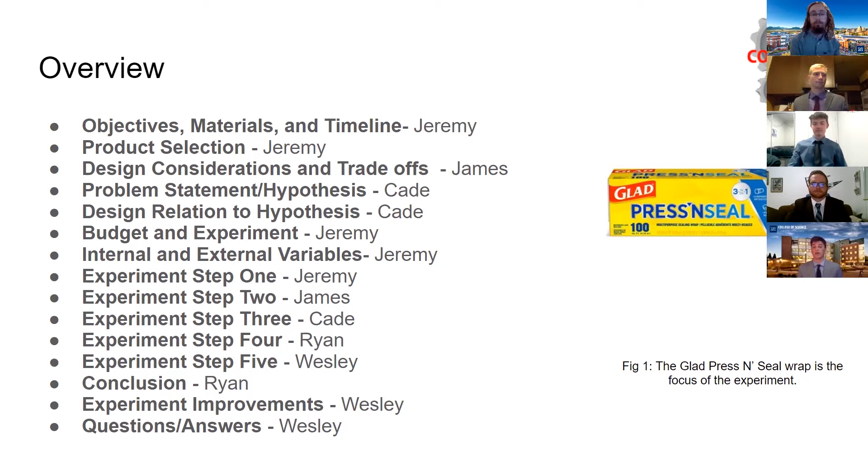And then we will be going back over to Jeremy, who will go over the budget and experiment, as well as the internal and external variables. And then we each divided up the experiment steps amongst ourselves, and then finishing out the report will be Ryan and Wesley. I will now be handing it back over to Jeremy.

Thank you, James. So before we could really decide on what experiment we needed to do, we came together as a group to really compile our resources and see what we could feasibly do for this class. The bottom line was pretty clear. We wanted to do this as cheap as possible as we are poor college students. Take a moment and consider what kind of variables and limitations affected your design choice.

Thank you. So for us, we decided that the budget should be minimal, that the items and resources we have available to us should be used first and preferably not bought or picked up. We needed to meet assignment objectives and due date, as well as also follow the time constraints selected by our group, which was to complete all assignments at least 24 hours before the deadline. And lastly, we needed to continue to adhere to our group's charter and objectives. Next slide, please.

With these limitations in mind, COVID-9 Team selected the Glad Press and Seal airtight and leak-proof test. So we now needed to develop a hypothesis and an experiment to test this theory and whether or not it was truly airtight and leak-proof. I'd like to pass things back over to James, where he will talk more on this.

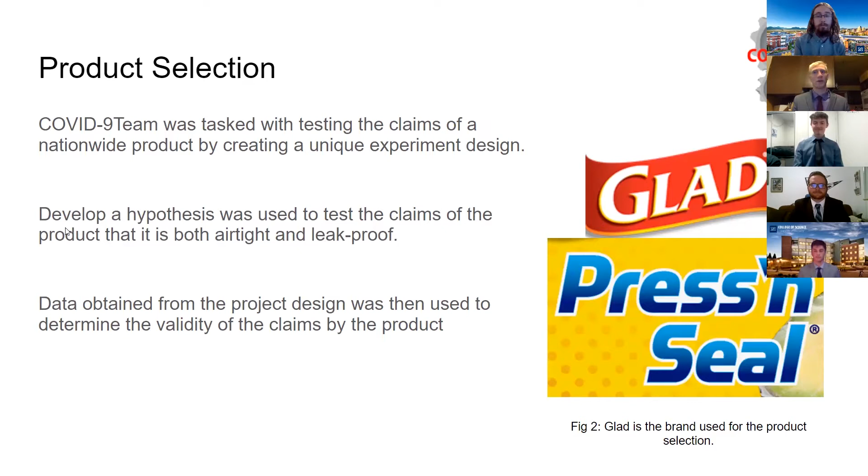Thank you, Jeremy. So we as a group decided to come up with 3 potential design considerations. The first one being a manometer, which is mostly used in measuring changes in fluid height. With that, we can then calculate other things such as pressure. For the second one, we decided to come up with a vacuum apparatus in which we attach a shop vac to a trash can that has been sealed with Press and Seal. And then for the third potential design consideration, we decided to come up with sticking a pressure gauge inside of a vacuum that has been sealed with Press and Seal.

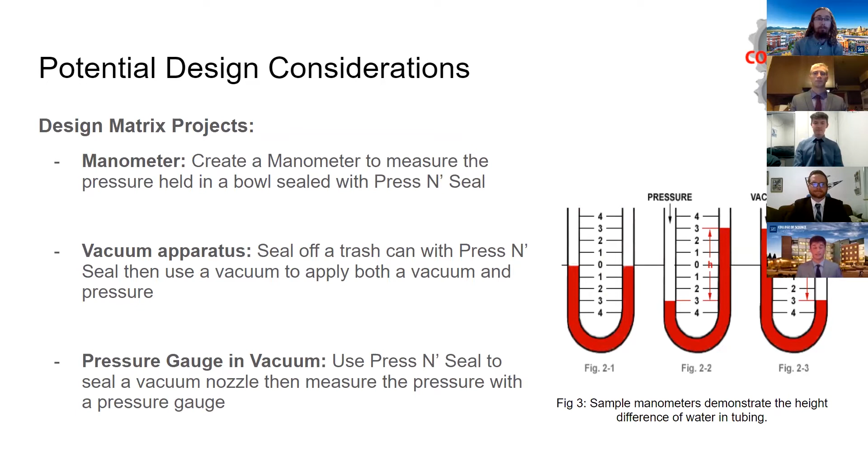I will now be going over the design trade-offs. So for each design consideration, there are obviously pros and cons. For the manometer, a pro would be that a volumetric measurement is easily transferable and could calculate things such as pressure, which is what our goal was for. However, there was a con with the manometer that any sort of exposure to air or leak in the system could lead to a false reading.

For the second design with the vacuum apparatus, the supplies were readily available. You could get them at practically any department store. However, the con with such a large air vessel with the trash can, it would be tough to not only seal it with the Press and Seal, but with a vessel that big, you could introduce multiple outside variables.

And for the third design consideration, the pressure gauge, it would give us a precise reading on the pressure. However, such a precise measuring pressure gauge would probably be hard to find for us college students because of a financial limitation. I will now ask the audience which method you guys decide would be the most practical based on your limitations.

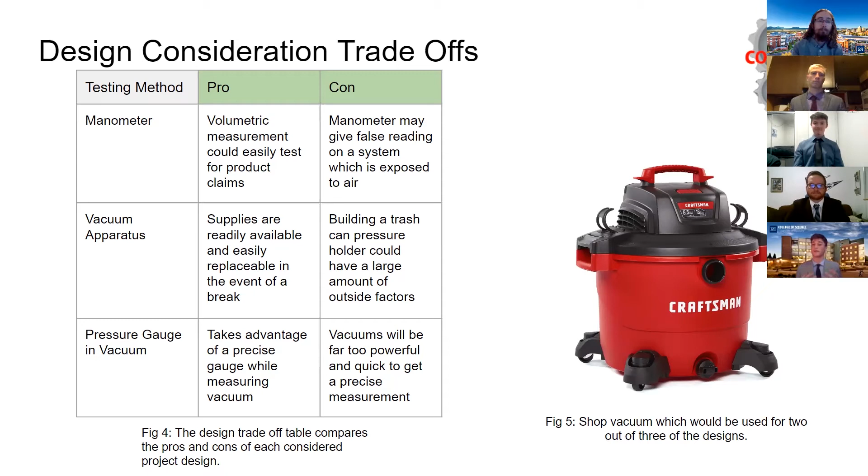Thank you. As a group, we did decide to go with the manometer, and I will now be handing it over to Cade. All right, thank you, James.

So the core problem statement for this assignment is testing the validity of the marketing claims. So the goal is to very much focus on the airtight and the leak-proof aspect of it. And so to test that hypothesis, we are mainly just checking if it can hold a seal for an extended amount of time. And if it's able to do that, it does confirm that the advertising claims are correct. The group essentially agreed that it's a lot of marketing and that the product would not be able to achieve that goal. Feel free to respond on the discussion boards if you agree with the hypothesis.

All right, thank you. And so for the project design justification, again, to just focus on the airtight and the leak-proof aspect, we're testing for can it be held for 5 seconds, both vacuum and pressure. And so overall, if it can do that consistently, we can confirm that it can hold pressure and vacuum, and it is airtight and leak-proof. I will now pass off to Jeremy to cover the budget and experiment.

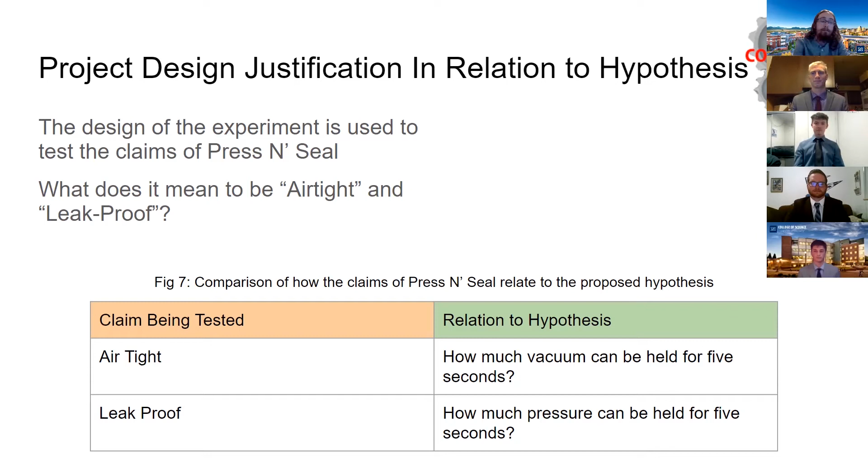Thank you, Cade. So with our project design chosen and our hypothesis agreed upon, we went about developing a budget that would outline how much we would actually spend on this design. As you can see on the chart, the figure behind me, the press and seal itself was about $8. The yardstick was about $5. The dishes that we used to test were an additional $5, and the bulb pump itself was a total of $15. All in all, we managed to keep our entire group cost below $35.

To put this in perspective, we did a little bit of research to see how much one of these manometers would cost if we just bought one online. And we discovered that had we done it any other way, the U-tube and pressure differential gauge alone would have cost us around $210. Next slide, please.

Now that we had made all of these decisions and bought our supplies, it was important to determine what variables we could control and what variables we couldn't control, or our internal and external variables. Some of the variables we couldn't control were the varying textures of different dishwares. Plastics and ceramics do not necessarily have the same kind of textures that allow plastic wrap to hold them as well. It might not have been an airtight seal on the pump that we used. And lastly, the density of the water might be affected by the food coloring that we add.

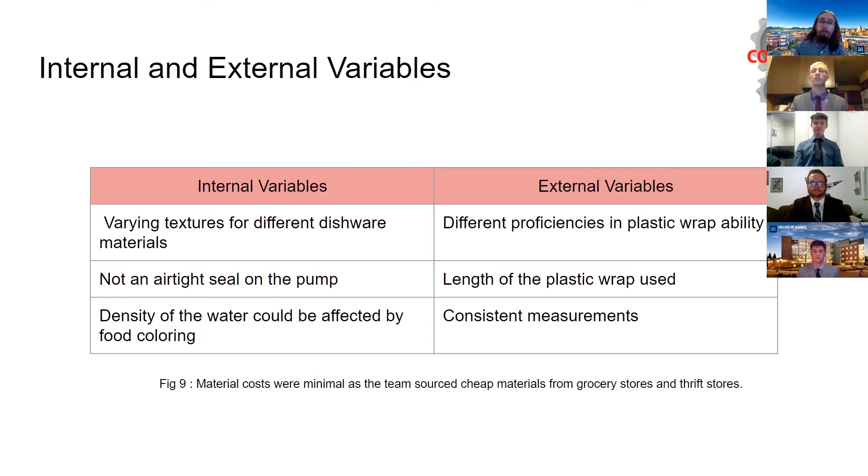And lastly, consistent measurement. Because we were using a manometer that was subject to the human eye of where it fell on our yardstick, we made sure we used only the same 2 group members each time to measure where our inches of food colored water was. Next slide, please. With all these things in mind, we assembled and put our experiment to the test.

We went ahead, and the first step was to take our plastic and ceramic dishware bowls and drill through them. We used a diamond drill bit provided by Wesley that had already been purchased for a different assignment for his work, and carefully drilled through each bowl to avoid shattering. Afterwards, we took a nozzle attachment for our hose and carefully screwed it into each bowl. This made each bowl airtight because after a couple turns, it could not enter any further. It could not get any more purchase on that bowl without shattering it. And next, I would like to pass things back to James to talk about step 2.

Thank you, Jeremy. So with step 2, it actually came down to group members sealing the 2 bowls, both the plastic and the ceramic. So we decided, because it was considered press and seal, we as group mates were tasked with sealing each bowl by only using a pressing method. And then we each decided that each member should only have 2 chances of sealing each bowl. So as a way of being consistent, each member had 2 chances per bowl. So that would be 10 total pressings for each bowl, which led us to 20 total data points. And I will now be passing it over to Cade for step 3.

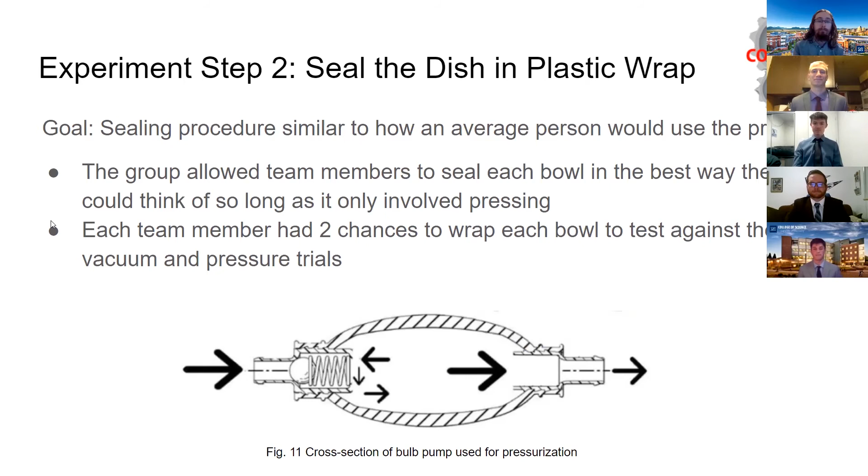All right, thank you, James. So for the next step, we actually attached the dish to the pump using a T-connector and clear tubing. We used the hole that we drilled and then got everything basically connected as tight and as sealed as it could be. That way it reduces the chance that that would be another variable affecting the experiment's results. I'll now pass off to Ryan for step 4.

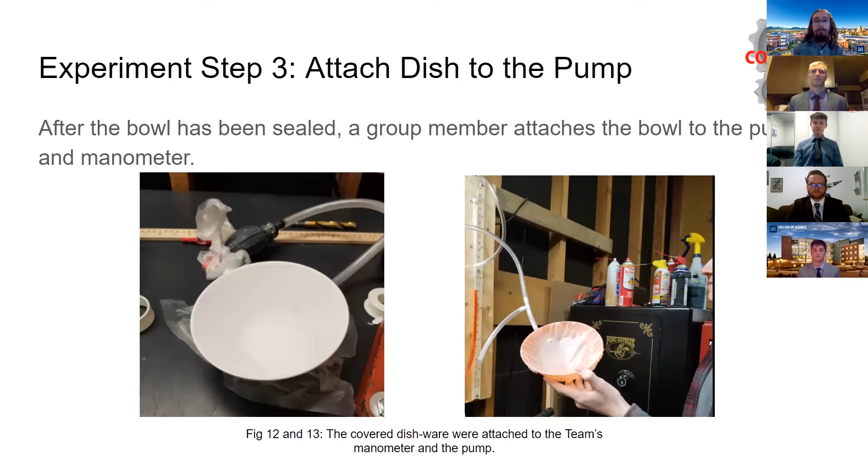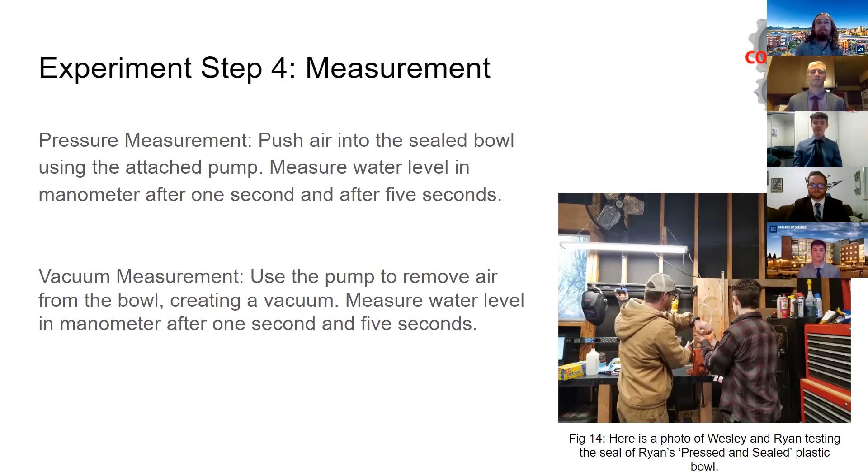Thank you, Cade. So the 4th step of our experiment was to take measurements. Each team member had 2 chances to wrap the plastic bowl and 2 chances to wrap the ceramic bowl. In order to measure pressure, we used the pump that was attached to the bowl to push air into the bowl. And to measure vacuum, we used the pump to pull air from the bowl. The water level on the manometer was measured after 1 and 5 seconds. And now I will hand it off to Wesley for step 5.

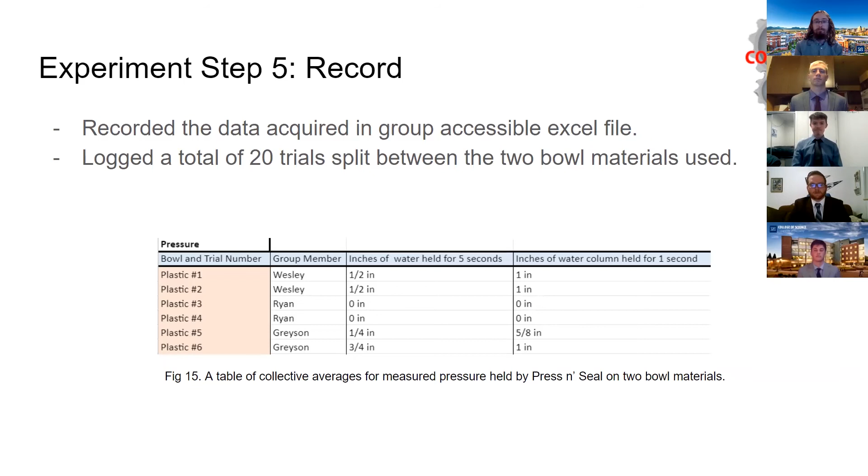Thank you, Ryan. Step 5, we decided to record our data using an Excel spreadsheet for ease of data manipulation and data analysis. We used a series of columns as shown in figure 15, where we wrote down the trial number and material used for the bowl, the group member that recorded the trial, the result that we got for 5 seconds, and the result for inches of water column for 1 second. Next slide, please. And now I will pass it off to Ryan to go over the conclusion.

Thank you, Wesley. So originally our hypothesis was that the press and seal wrap would not create an airtight seal over the bowl. Overall, our team was able to design and conduct an experiment, also on a tight budget, that allowed us to collect accurate measurements about the levels of pressure that the press and seal wrap could hold.

Looking at figure 16, we can see that the average inches of water held by the plastic bowl are 0.375 and 0.638 inches for 5 seconds and 1 second, respectively. And the averages for the ceramic bowl are 0.325 inches for 5 seconds and 0.725 inches for 1 second. Now, I'd like to give you guys a few seconds to look at these numbers and come to your own conclusions about whether or not our hypothesis was true.

So, although the values of these numbers are pretty small, we can still conclude that the press and seal wrap created an airtight seal over the bowl, which is a contradiction to our hypothesis. And additionally, since 2 different bowl materials were tested, we can also infer that the press and seal wrap is able to work on multiple surfaces. And now I'm going to pass it off to Wesley for the experiment improvement section.

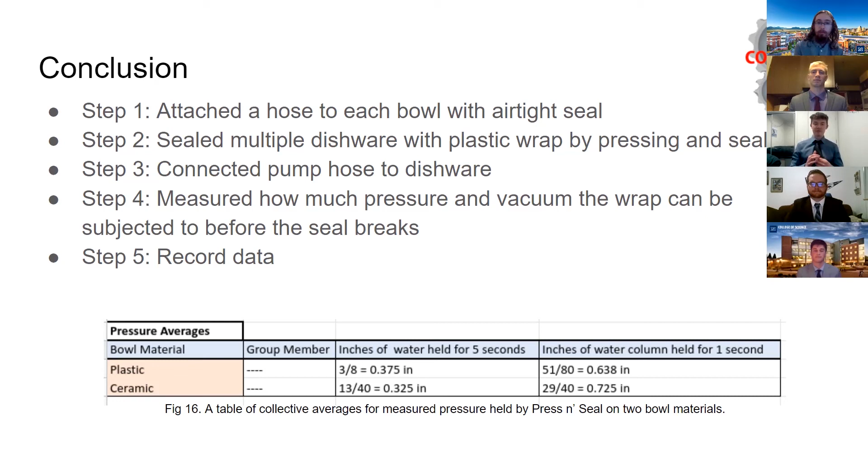Thank you, Ryan. For possible design improvements, we thought that replacing the pump would be an excellent improvement. During our experiment, we found that the pump itself had a minor air leak and lost air at a steady rate. Even though we had this issue, we still accounted for this air within our calculations. But it would be a drastic improvement to know that our system is in fact a perfect seal. The issue was within the valving inside the pump. So I think buying a more specialized or possibly even a more expensive pump would improve our results, but might cost more money, which would be a potential drawback.

Now I would like to ask the audience to please use the discussion board and list a possible design improvement that you guys might have for our design based off what you've seen. So I'll give you a moment to list them out. Thank you for listing your possible design considerations. Now we move on to the result comparison.

The literature that I was able to find on previous studies was conducted by teachbesideme.com, where they conducted an experiment with Glad Press and Seal to test whether it's able to hold water, rocks, marbles, and rice in an upside down orientation without breaking the seal or leaking. In their experiment, they found that it was in fact able to hold water, rocks, marbles, and rice, which coincides with our conclusion that the Glad Press and Seal is in fact airtight and leak proof. Figure 17 displays how they set up their experiment.

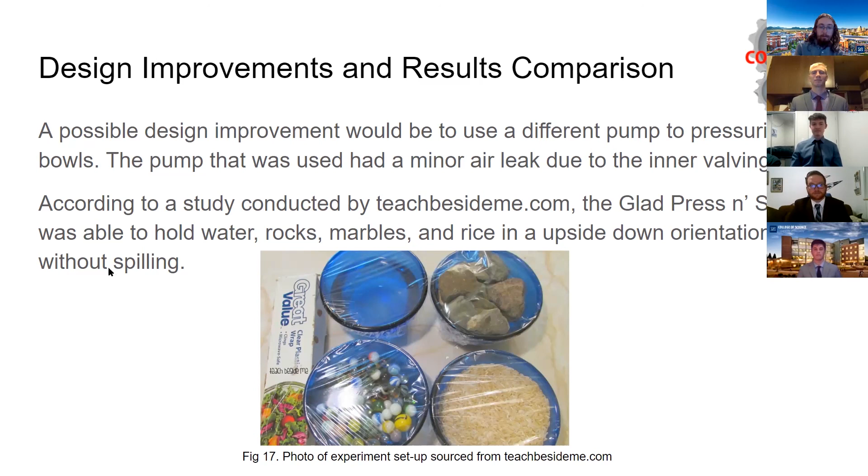And now we move on to the question and answers portion, and we would like to open the floor for any questions that you guys might have on our presentation. All right, thank you for your questions. This concludes our presentation, and we would like to thank you for your time and listening to what we have to say.